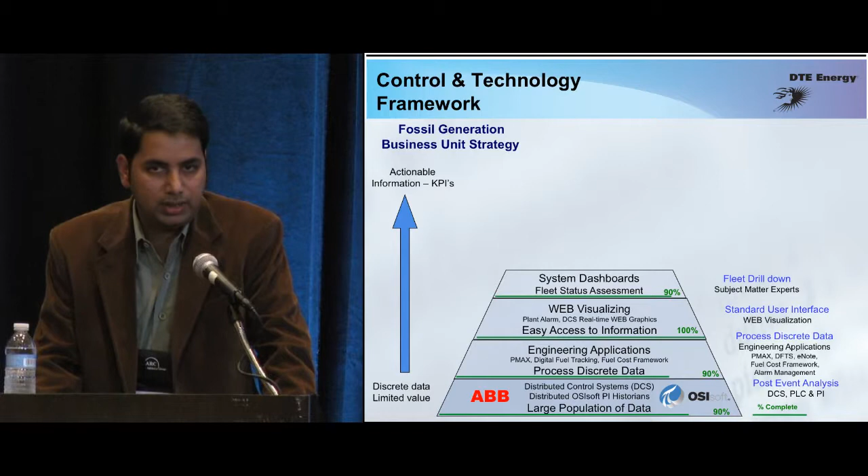Following that would be system dashboards, meaning focusing on different major aspects of your business. For power generation, it could be systems like a condenser system or a turbine system, etc. Then after that we get into the area of expert systems, where you're trying to predict - you have lots of historical information, you're trying to predict when an equipment fails, when a process goes out of whack or deviates. Closed loop optimization - those are all the expert systems in that layer.

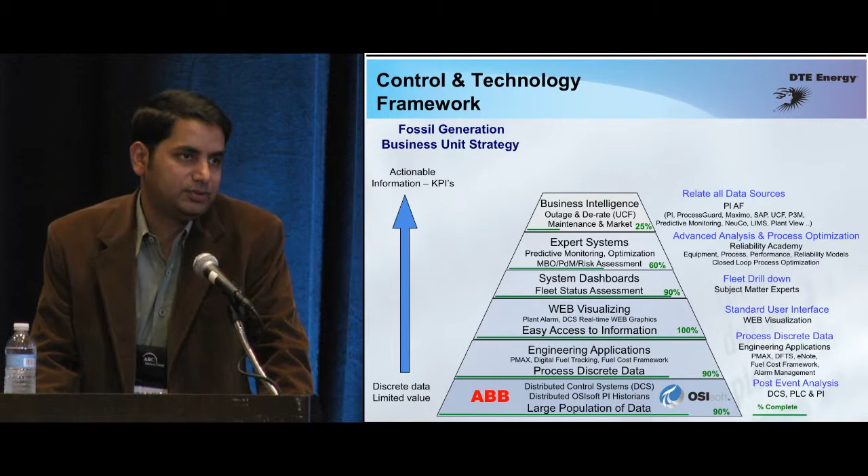Then following that would be your integration with your business systems - how the engineering data is being blended into your business systems, and that's what that particular layer deals with. Finally, the topmost layer of the pyramid is nothing but an amalgamation of people, processes, and technology.

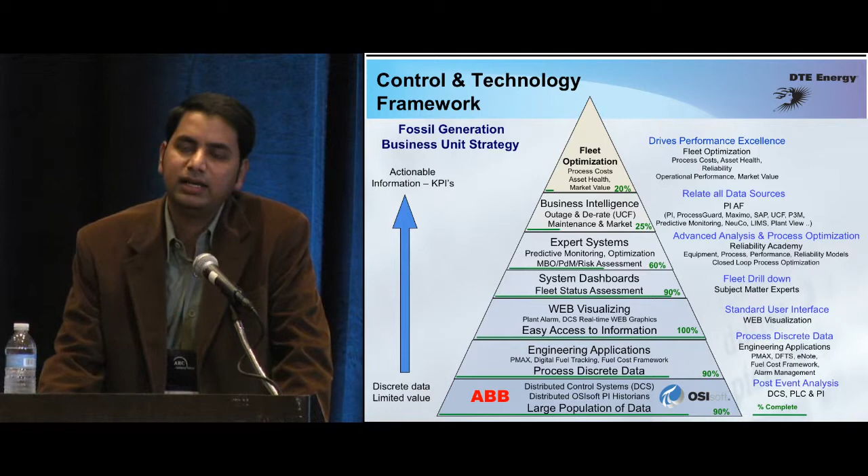So again, here's our remote operations center. The analogy I give people when they ask what this does is, you could call it your NASA command center, or as I like to call it, basically your air traffic control. The plants are located remotely. The control room operators at that plant run the show, they're like the pilots in an airplane. But the remote monitoring center is the one directing them what to do, warning them about impediments, weather changes, what's going to happen. All those directions are provided by our remote monitoring center. They're staffed by very experienced people from operations background, typically people with about 25 years of operating experience in a power plant, from the technical, engineering, and operations background.

So let's go through the pyramid one more time and look into some of the applications. As I said, the bottommost layer is where you have the majority of your data. PI systems are propagated throughout our company. Every plant has it by default, every new location that comes out will have a PI system. The obvious advantage is it's one single source where all information gets aggregated and captured, and you can exchange information from one location to another very easily using the PI to PI system.

Now for the remote monitoring center, they need to monitor data from every site, so you capture information from all the sites. Here's a typical technical structure of a plant. A plant may have anywhere from 20 to 30 data sources at the control system level - PLCs, auxiliary systems, DCSs together. But where they converge is all the data goes into the PI system, and that's central to everything.

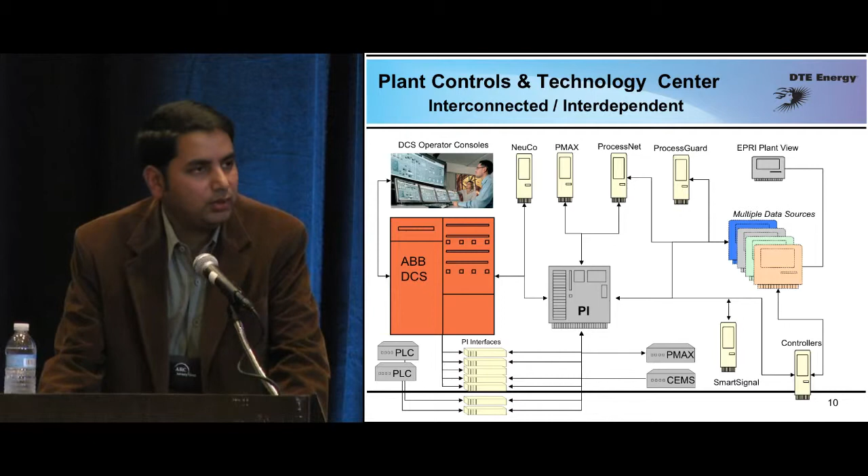Once you have your raw information, what can you do? You can do a lot of data analysis, and people do it. It's simply looking at these data points. You can do some trip analysis, some optimization - all of that can be done.

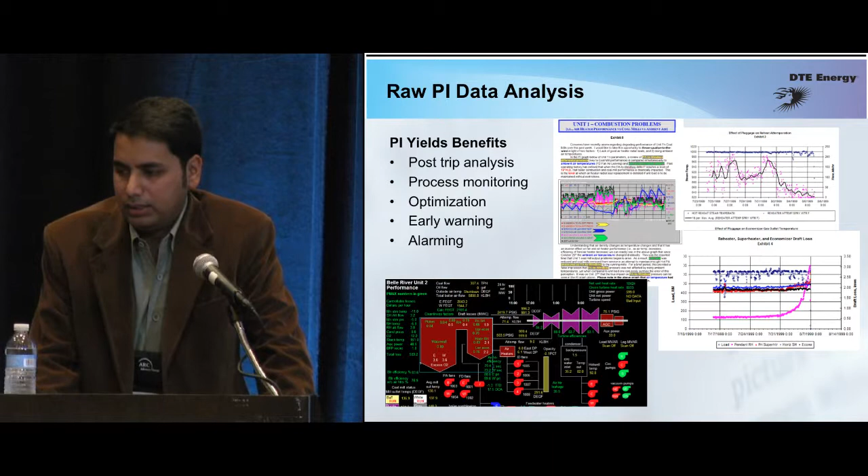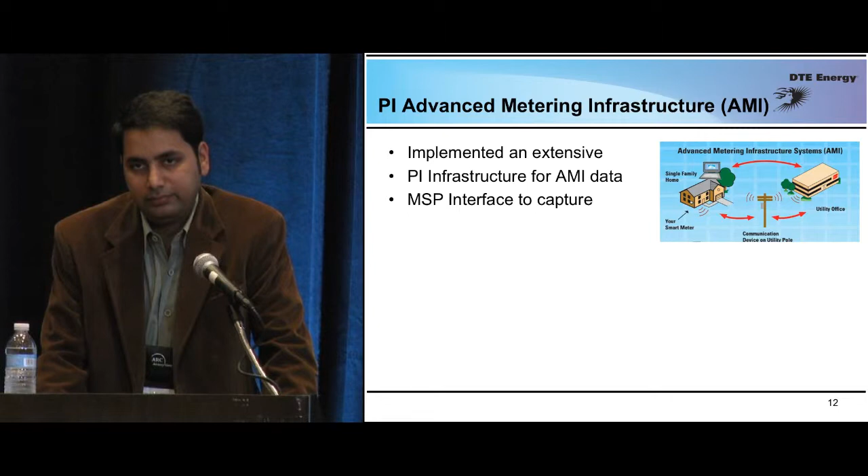But the bottom layer is expanding. From a generation side, we have a lot of this information on the plant side, but when we distribute power to customers - as I said, we have 2.1 million customers - you must have heard the term smart grid, smart homes. Part of that is there are smart meters being rolled out to customers. Each customer has a smart meter in his home capable of giving about 25 data points. With 2.1 million customers, you can do the math. As of today, we've rolled out about 1 million of these smart meters, so we're capturing about 25 million PI tags - valuable information being done remotely. So we have a huge infrastructure of PI systems capturing information from customers. The point being, the bottom layer is expanding, and it's going to expand.

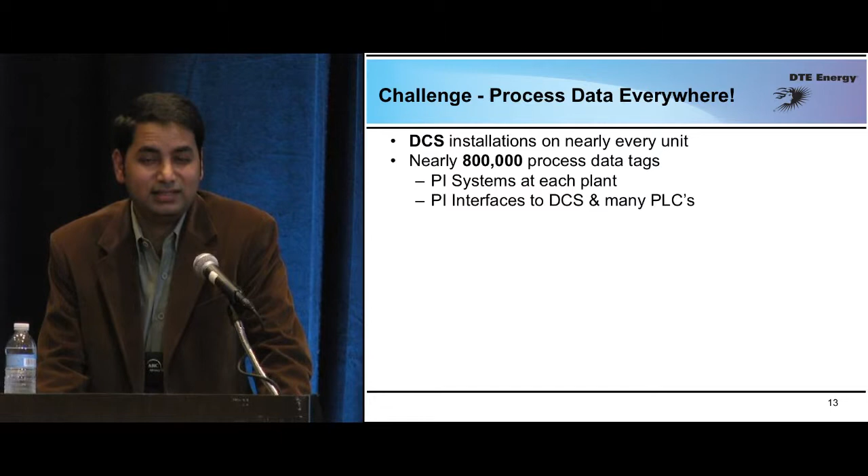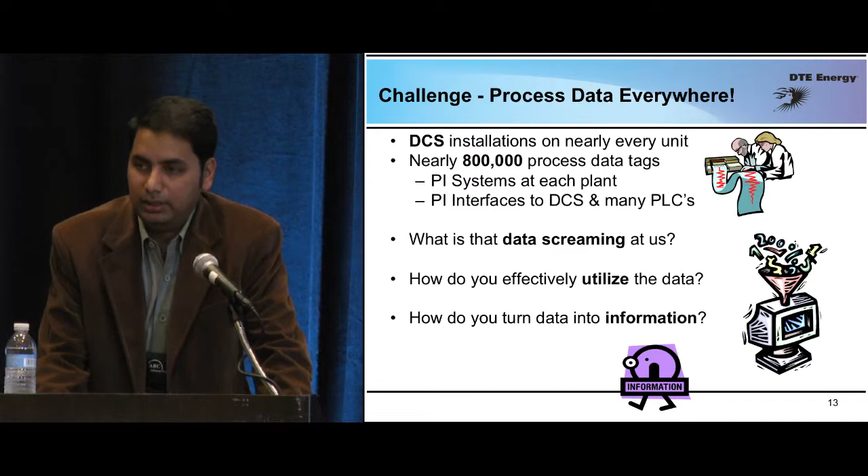So I'm going to focus the rest of the presentation just on the generation side of the business. As of now, there are probably about 800,000 data points just on the generation side, with DCS installations and PI installations everywhere. So the challenge is, where do you find the needle in the haystack? What's this data telling you? How effectively are you going to utilize this information, and how do you turn data into information? Those are the challenges, and the technology pyramid is the way we're trying to address it.

So once you have data, you do a lot of engineering applications. What are you going to do with these engineering applications? Some examples: a power plant is a huge thermal cycle, so all of your thermodynamic calculations for the mechanical engineers, all the inputs are coming from PI. The calculation engine just computes, crunches the numbers, and writes the values back to PI.

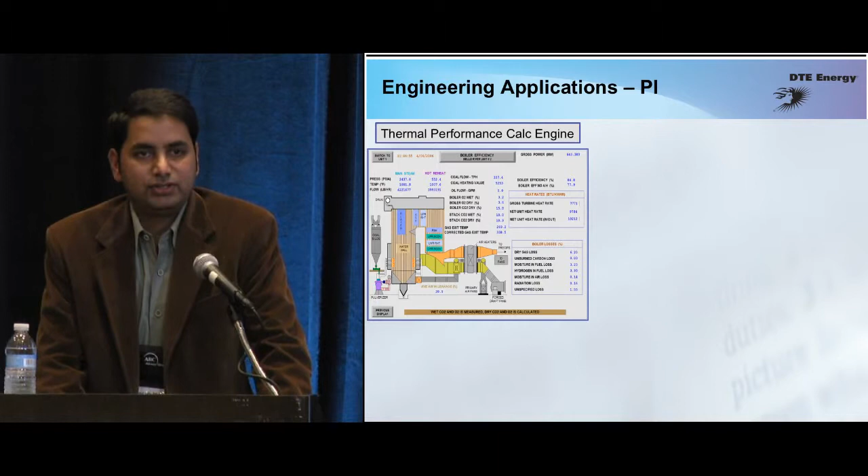That's one example. Number two, coal-fired utilities burn a lot of coal, so 95% of our expense is procuring fuel and fuel-related expenses. That's close to $1 billion at one location we spend just on procuring coal - that's our fuel expense. So we monitor that, and all of that is done through PI. That's another example of an engineering application.

The third one is your emissions monitoring. Power plants emit a lot, and there is an emissions trading floor. For example, if you emit NOx, NOx emissions are being traded in the market.

With PI, we use it to monitor the real-time operation of a plant, and the value of that emissions is basically traded in an emissions floor. So you have to capture the market value. That is done through an interface from OSIsoft called PI-to-HTML. It just goes on the internet to any website, captures a data point, brings it back. So what we're able to do is compute immediately the value of the emissions we put into the air. That goes into part of our emission strategy.

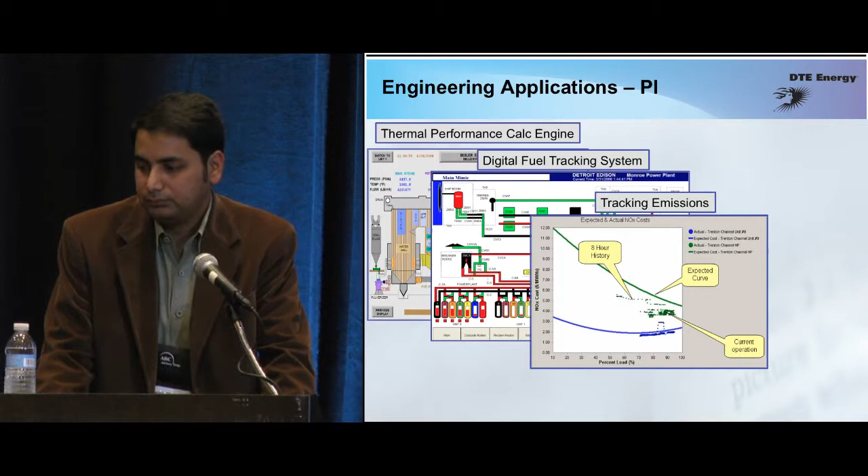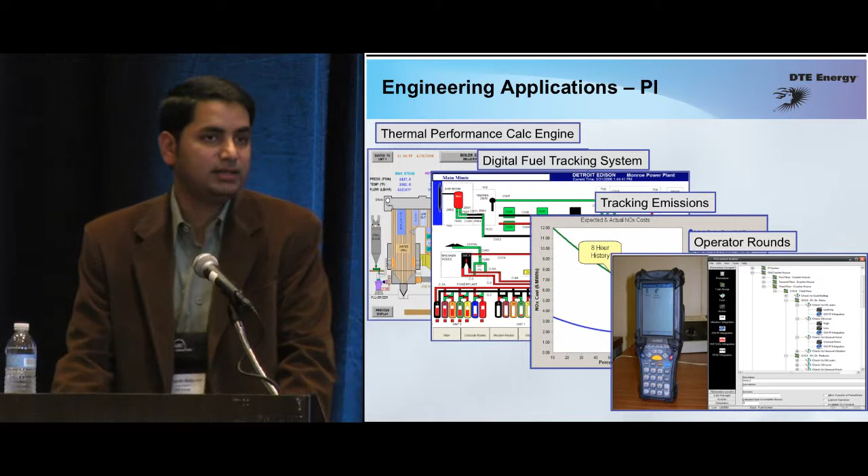Then finally, there are several processes in the plants. For example, operators are required to periodically go out and record readings, do their rounds. All of that is done through mobile devices, and that information is stored back into our PI system. So those are some examples of engineering applications.

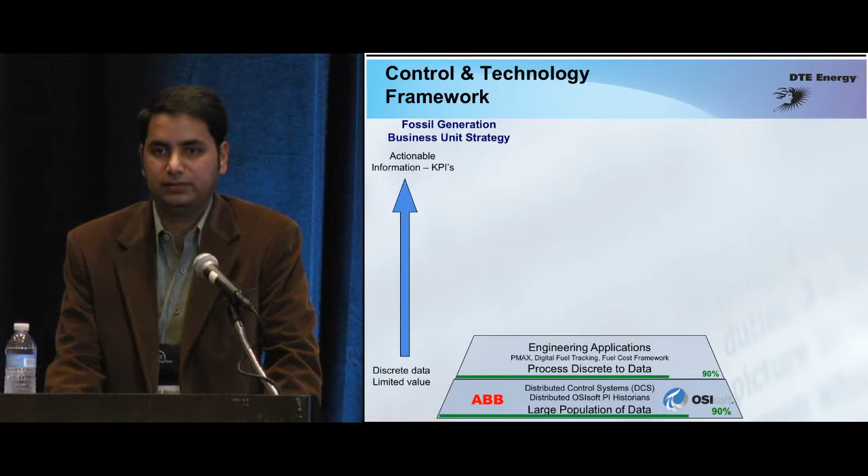Now the next layer is fleet-wide monitoring. We were doing a lot of point-and-shoot applications at a unit level, at a plant level. We never thought about it from a fleet perspective. This is about the 2005 timeframe, when our company was getting into a market where we were going to actively bid all of our generation into a market called an independent system operator market.

In the Midwest, it's controlled by an entity called MISO, Midwest Independent System Operator. We're going to compete with about 15 other utilities in the Midwest region, and the cheapest person gets to generate - the expensive units are going to be shut down. So it was impetus for us to run the fleet from a fleet perspective, the whole business together, rather than just a plant manager running his particular plant.

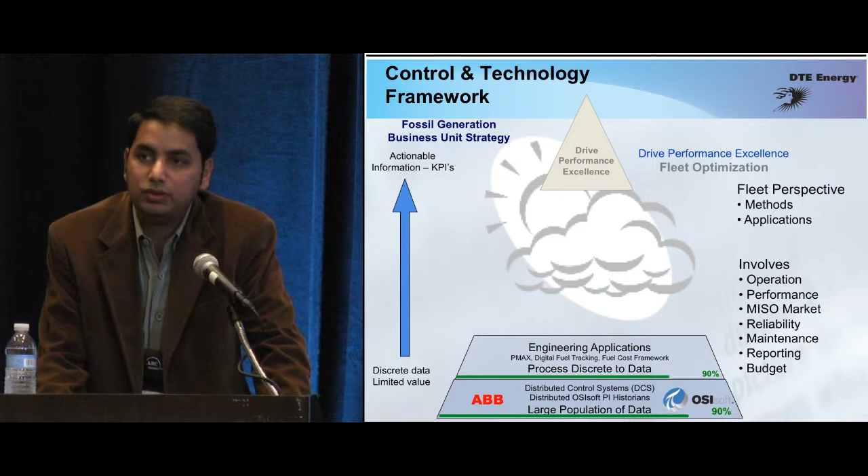So one of the first things we wanted to do at that time from a fleet perspective was give people the ability to look at this information, which means a lot of methods involved, and quite a few departments involved. Pretty much all of your various groups within your organization have to be part of this fleet-wide monitoring solution. One of the first things was the ability for people to view this information on a web portal.

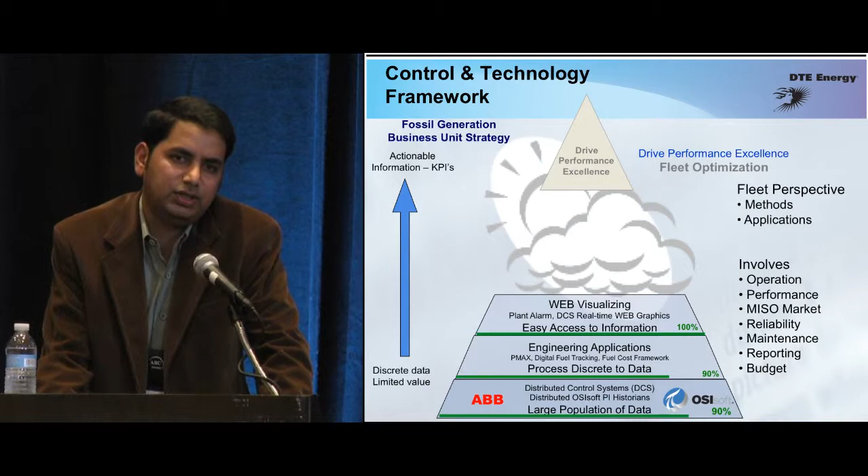Majority of you know that control systems are very isolated networks, which means when operators are controlling a unit, the distributed control system graphics are not available on your corporate business network. But that information is stored in PI. So what we have done is replicated about 6,000 DCS graphics into the PI system with the PI data as the background.

Now the remote operations center has the same look and feel of all the units in the fleet - 19 units, all the graphics done in this particular system. Now everybody knows what the plant operator is doing in real time, and this is one of the reasons why a remote monitoring center came into being. That's the primary reason - a virtual control room.

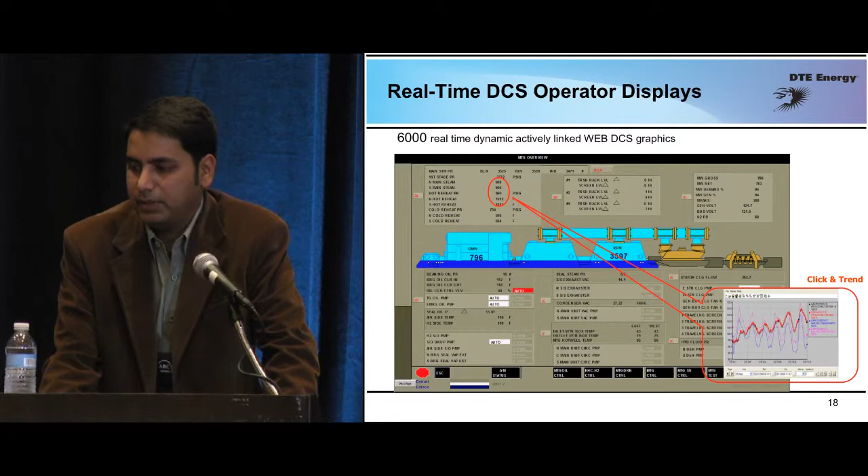You can do some simple data analysis with this information. You can actually replay events. Say you had a unit outage last night between 12:01 and 12:06 - what was the operator doing? You can just go back and replay the events and watch what he was doing.

Another example is a wind turbine - it's an AF element relative display. I'll talk about it later in the presentation, but that's another example of a display.

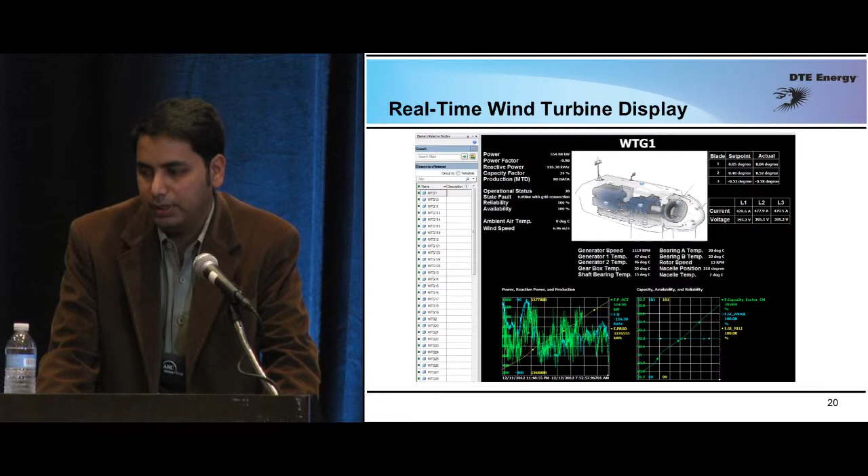Mobile workforce - let me tell you, here's the space that is rapidly changing. We're doing quite a few things because, as you see, the mobile platforms that have come into being right now, there is a lot of testing going on in our company. A lot of new applications will be rolled out.

But as of today, what people can watch is exactly what your units are generating, some statuses of equipment. You can see the engineering parameters on a turbine. I can look into how well you're doing in the market, the load trends of the whole Southeast Michigan. You can also look into if there are any outages and how the customers are getting affected. So all that was done through the mobile effort.

Now, after the web displays were done, we started focusing on system displays, saying that, okay, you have expertise in various systems in the plant, right?

So you have a turbine expert, a coal mill expert, a generator expert, and his focus is purely on his piece of equipment. You have generators in every plant, so his objective is to monitor that piece of equipment and nothing else.

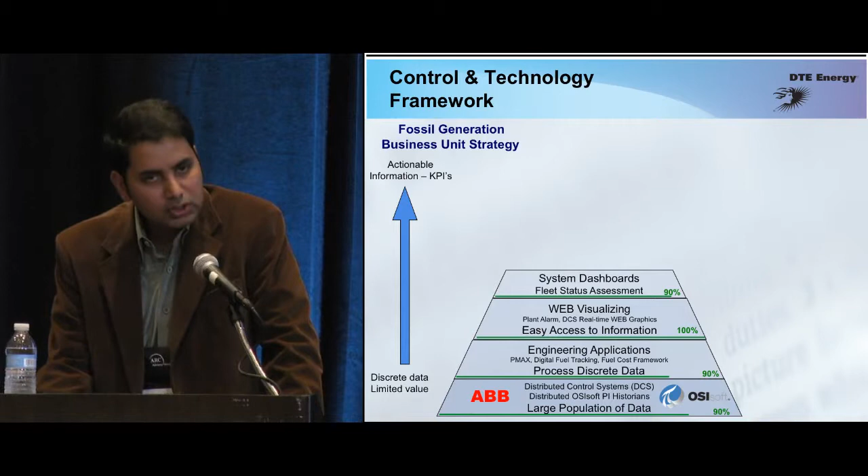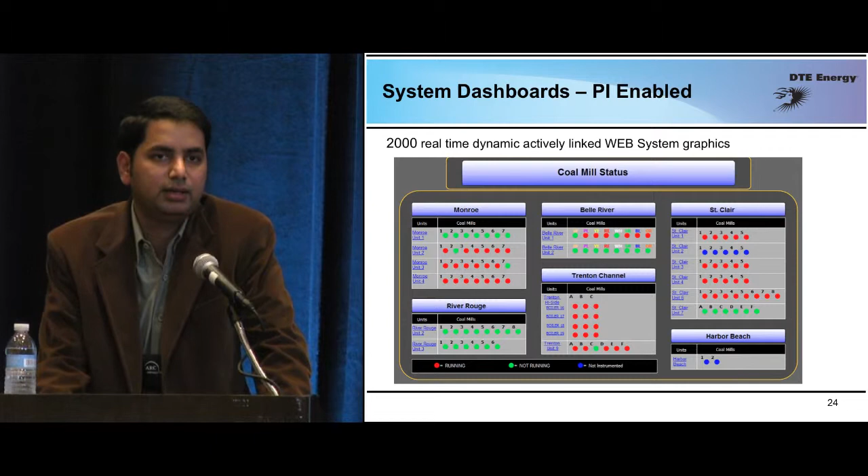So we created quite a few of these system dashboards. An example would be if you want to monitor all the 110 coal mills in the fleet, you have it available to you. That's the status of it. You click on it, it shows you detailed engineering information of those coal mills.

The next layer is called expert systems. This is where we're talking about predictive type systems. We've had the first PI system since 1999, so we have history for about 13 years right now. It's valuable information regarding your equipment.

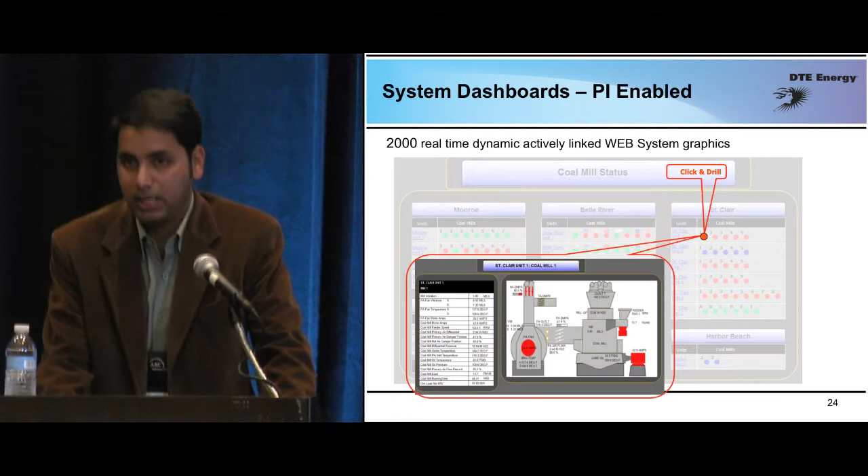If you do some sort of statistical analysis on that data, and you have some pattern recognition software that takes all this historical data, it will be able to predict an impending failure. That's what a system, this SmartSignal system, does.

Typically how it runs is you have in a control system an upper limit and a lower limit. When you hit those limits, there's an alarm, an audible alarm comes in the control room, which means by then the damage is already done. So you're in a firefighting mode at that point.

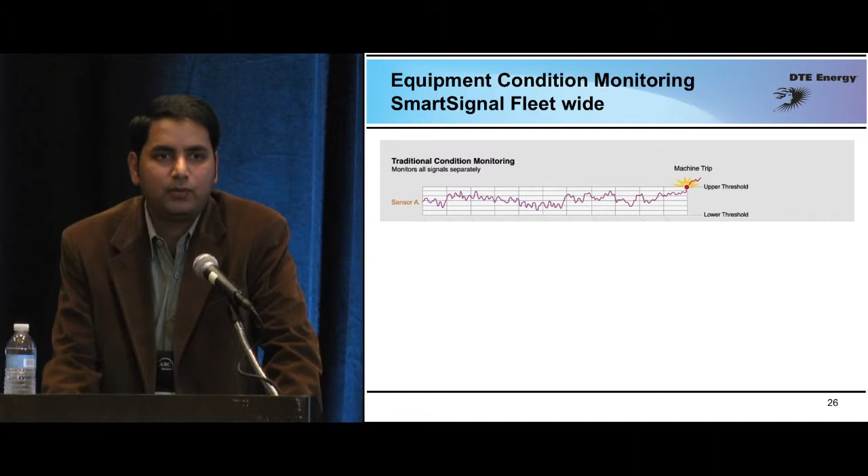What this particular equipment monitoring system does is it's correlating a data point to all the data points, all the inputs of that particular equipment, and it's trying to alert on a statistically deviating process well before it hits any of the control limits.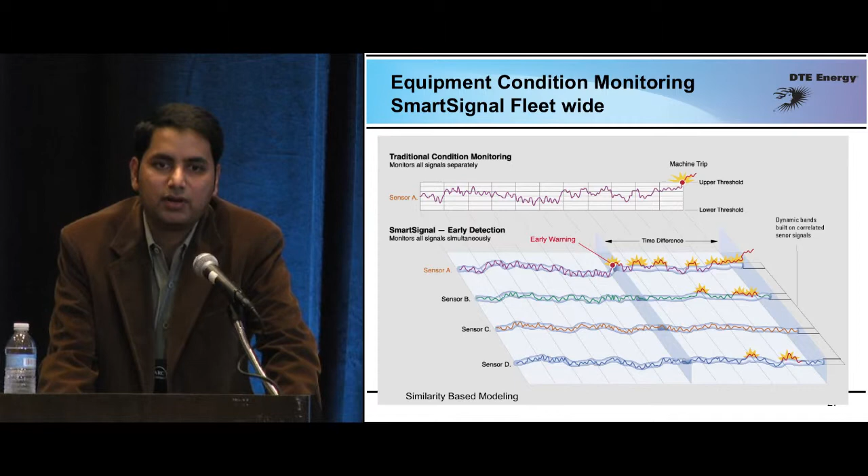Sometimes it can warn you of a failure like 45 days in advance. And that's very important for you when you are trying to bid your generation into a market. You know exactly that that equipment is faulty, it might come down, so you can hedge your bets very well. We have about 1,800 models on this particular predictive monitoring software across all these pieces of equipment.

Then we're going to get into the next layer, which is your business intelligence layer. I'm going to show you a couple of examples. One that is already in use, the second one is a work in progress.

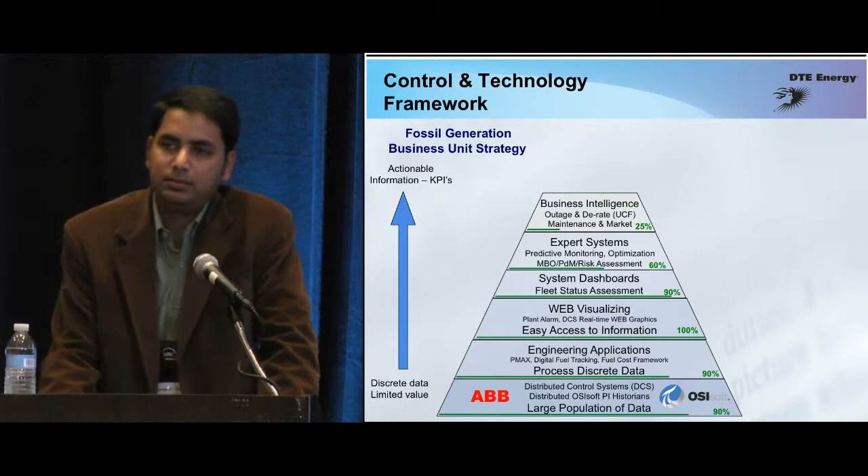So the first one is, as I said, we are part of an independent system operator market where we have to bid generation. So how we do it is, we have a day-ahead market, a real-time market, and a market strategy. All of your generation statistics are coming from your power plants in real time through the PI system.

This information, along with our predictive monitoring software, they use at our remote monitoring center, and then it devises a market strategy on which unit to be offered, when it needs to be offered, at what price it needs to be offered. Once the strategy is figured out, that information is sent to MISO. And then whether your bid was accepted or rejected, that feedback is sent back to the plants.

Now the plants know that, well, you have to generate X number of megawatts for this particular cost. If you don't do that, there are market penalties associated with that. That's a powerful business application at that layer.

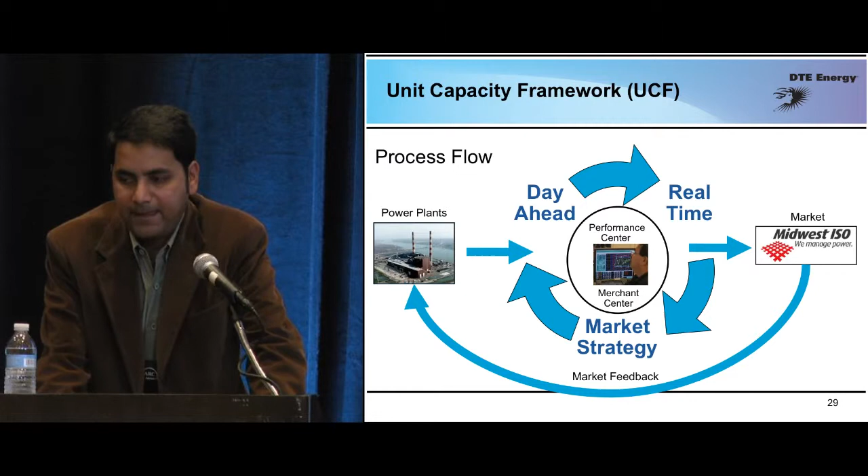Now the other example, as I said, in that particular layer, when we talk about business system integration, all of the layers below that were purely focused on engineering data. What would be more powerful is if you take this engineering information and blend it with your business systems.

For example, your work management system, your supply chain system, or your financial management system, and say, hey, I've lost 100 megawatts, a unit outage cost me 100 megawatts, and it translates into X number of dollars of revenue lost to the company. That's very powerful.

And that's where we were wanting to get, and that's the work in progress. So I'm going to show you basically how this is going to happen. And that pretty much completes our technology framework.

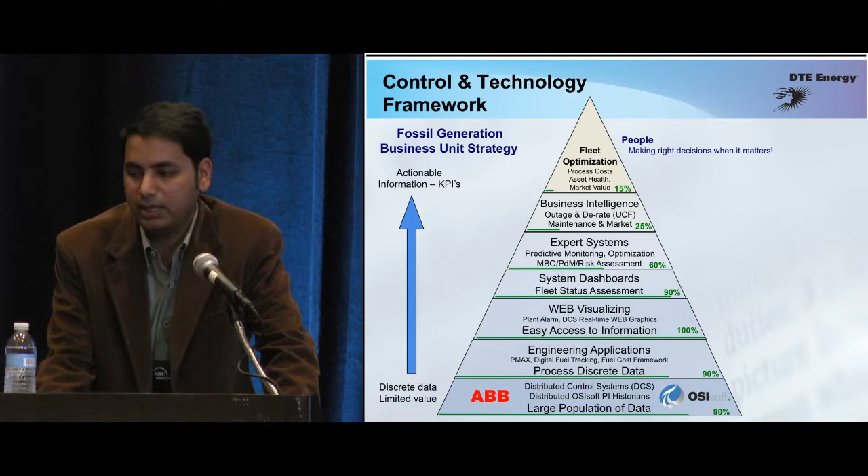But the top layer, the topmost piece, is not a technical piece. It is basically empowering the people to make the right decisions. So let me show you the work in progress.

So in the last 10, 12 years, we've rolled out the whole technology platform, technology pyramid, a lot of applications, going from very little data to a lot of data. So if I talk to a person in a plant about what he feels about information, does he have access, does he have everything at his fingertips, they are actually inundated with information. Their situation is something like this.

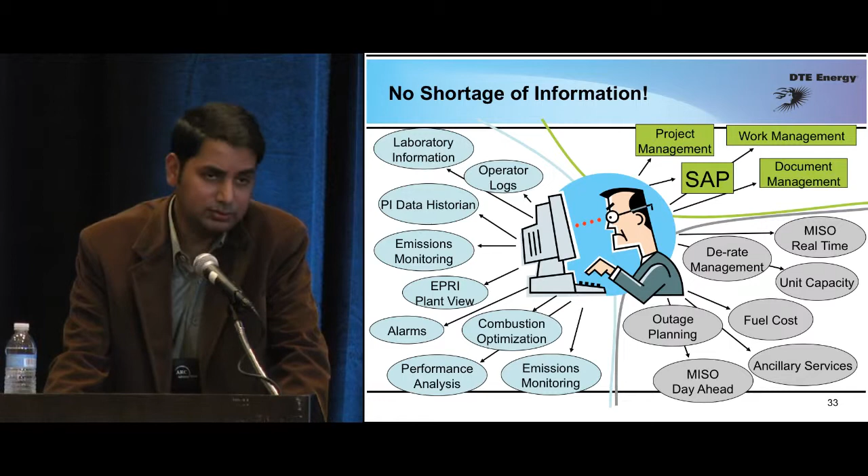So they're confused about which system to go to get what data, and what that system's login credentials are. That's a typical user, at least in a power plant. So we're trying to solve the problem of this particular user.

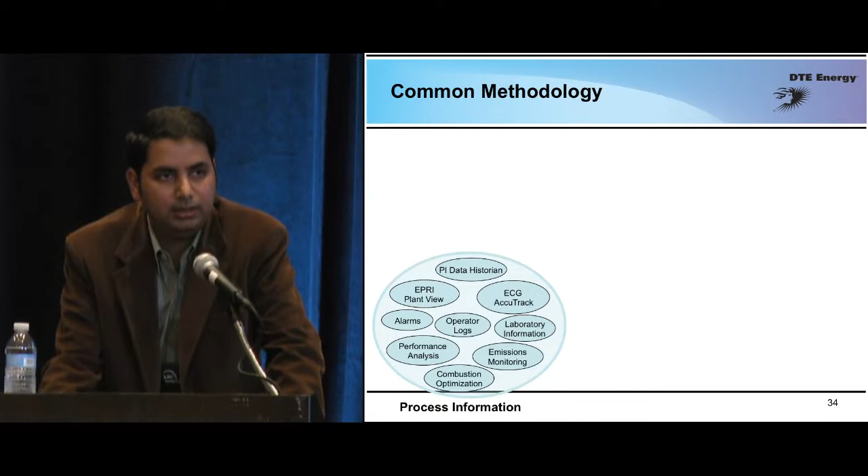The methodology we have is to pool all the information from systems like process information into a bucket, business systems into another bucket, market information into another bucket, and pool that information through some sort of middle tier application and show it to the user on a single front end. No need to go into any of the applications, it just comes into this one single application.

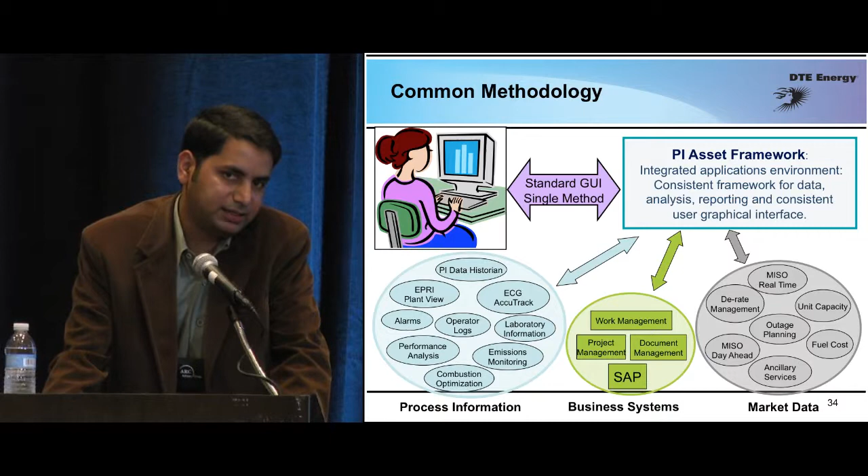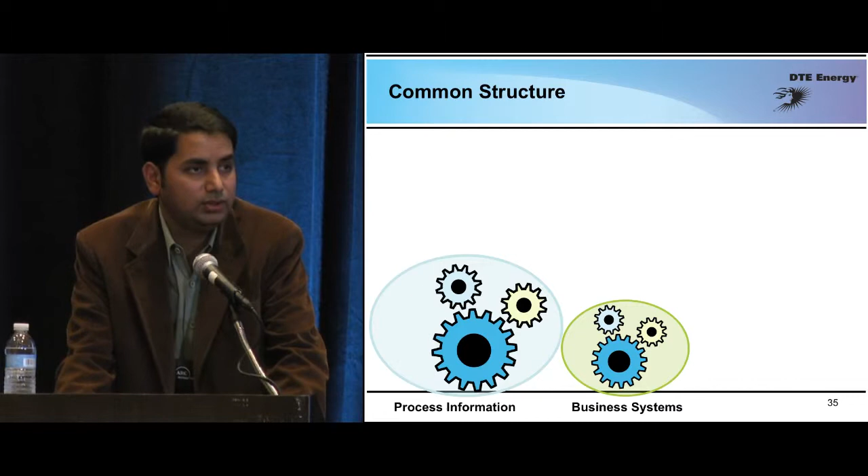From OSIsoft's perspective, they gave us a tool called PI Asset Framework. One of the requirements of this framework is that systems might change, but this whole technology should not fail because of that. Systems should be so transparent that changes just propagate. For example, your hierarchy in your work management system might change, but there needs to be a continuous feed into this system that synchronizes it all the time, so changes get propagated and the user is not affected.

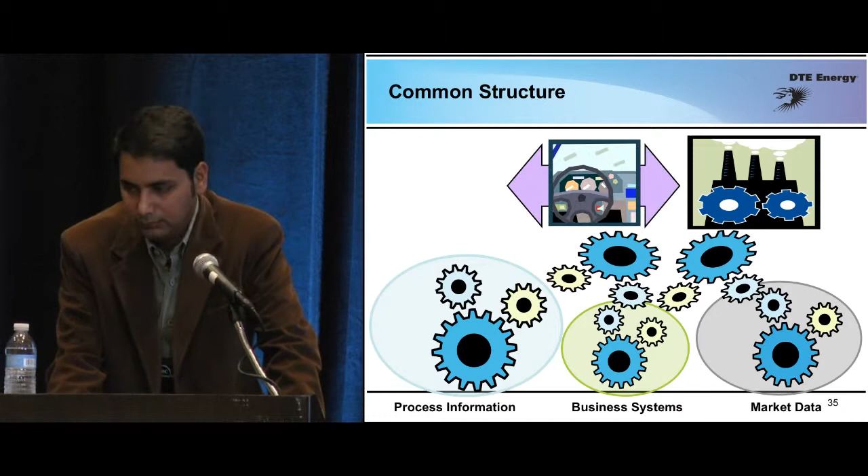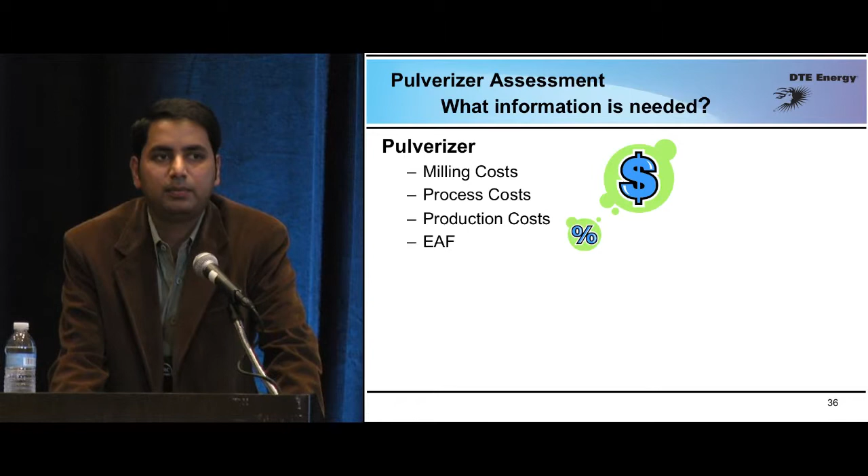Take an example of a coal mill. As of now, a coal mill expert can only see engineering information available in your DCS and PI system. But for him to make an objective decision about the overall health of his coal mill, he needs more information, like production cost information, reliability metrics, equipment predictive model output, what the work management system is saying about the work performed on that piece of equipment, alarms, etc.

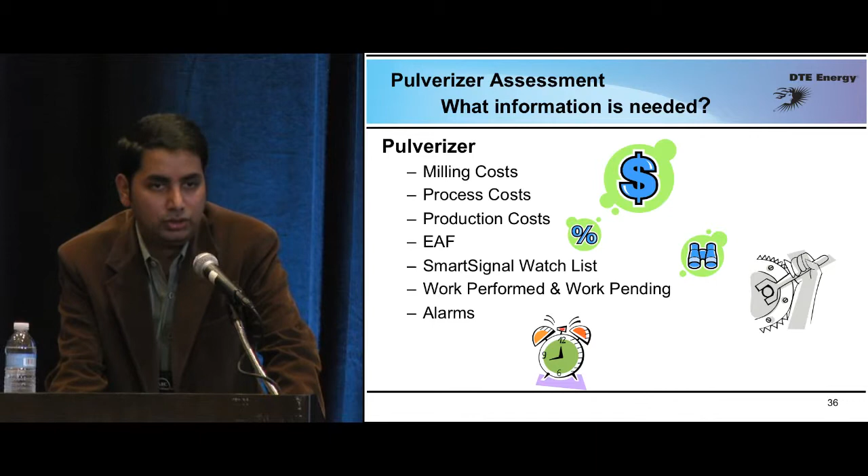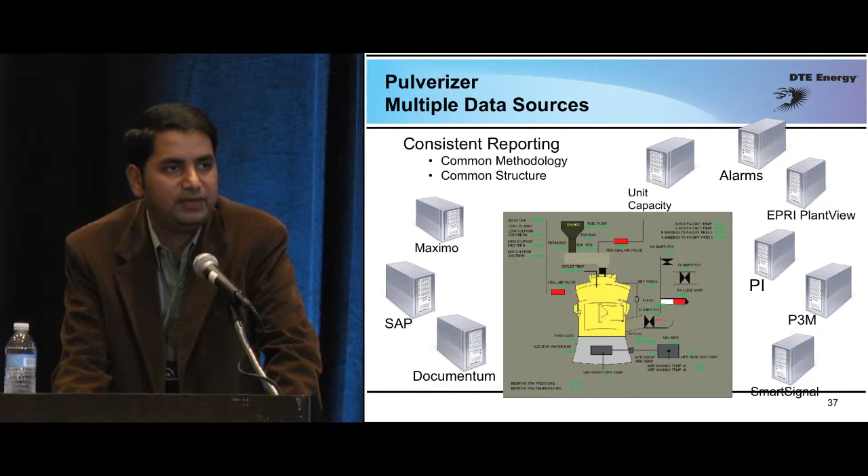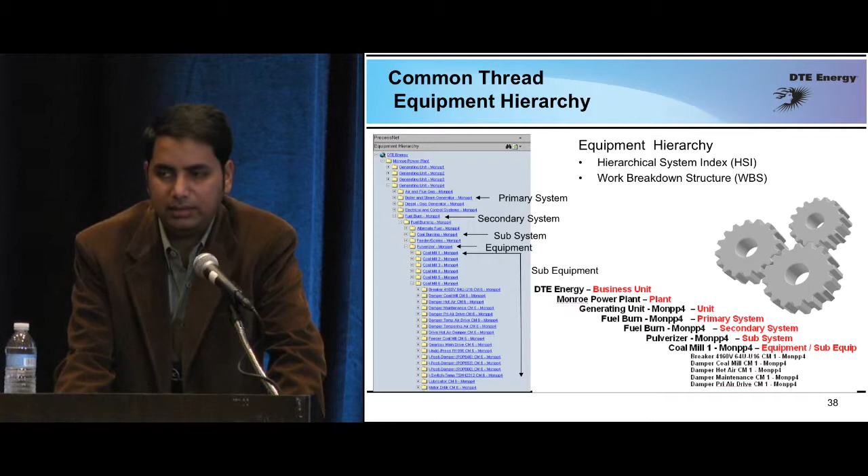If you want to take this simple DCS graphic and put in all that information I highlighted, all the KPIs, you would have to talk to so many systems, and each system is different technically, so there's no one-to-one correlation. So you need some sort of common methodology. For us, we call it an equipment hierarchy, a logical layer that organizes all of your assets in the company. You take this logical layer, design each of your systems, apply it on each of your systems, and then you can talk with all of the systems seamlessly.

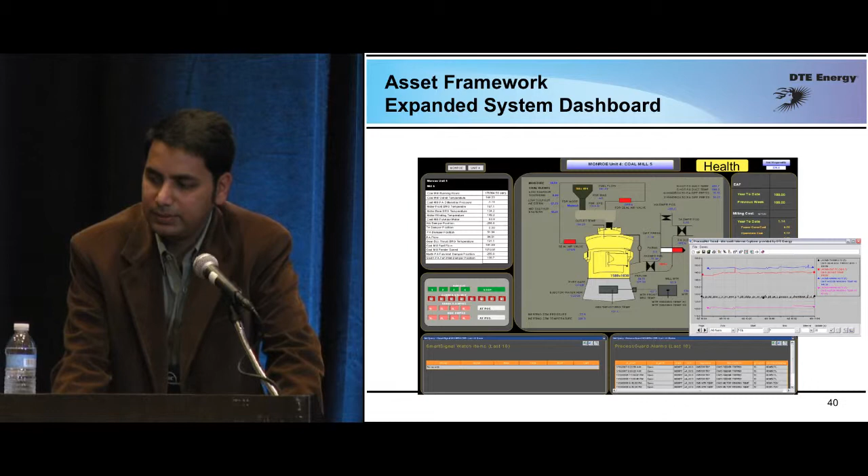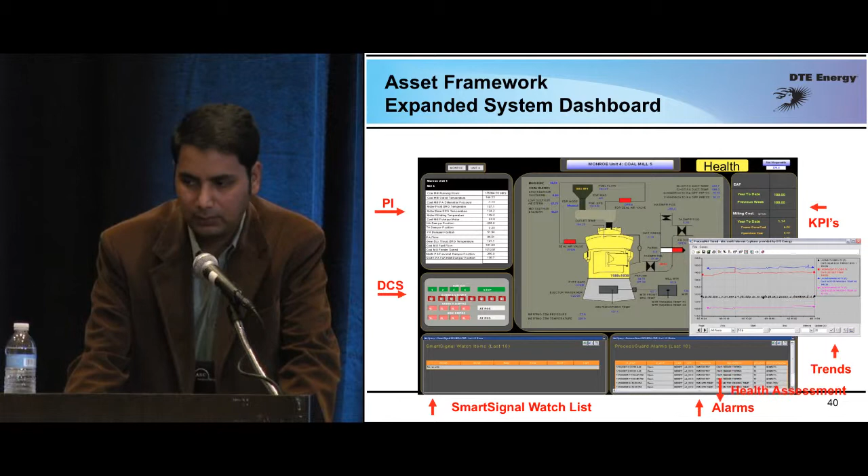Once you do that, you have an expanded dashboard that has information from your PI, your DCS, your SmartSignal, your KPIs, your alarms, trends, your asset health. In short, if you create a model for just one piece of equipment, you can replicate it to other like pieces of equipment. PI Asset Framework is the way to do it, and that's how we're doing it. We've started, we are in the process of doing that work.

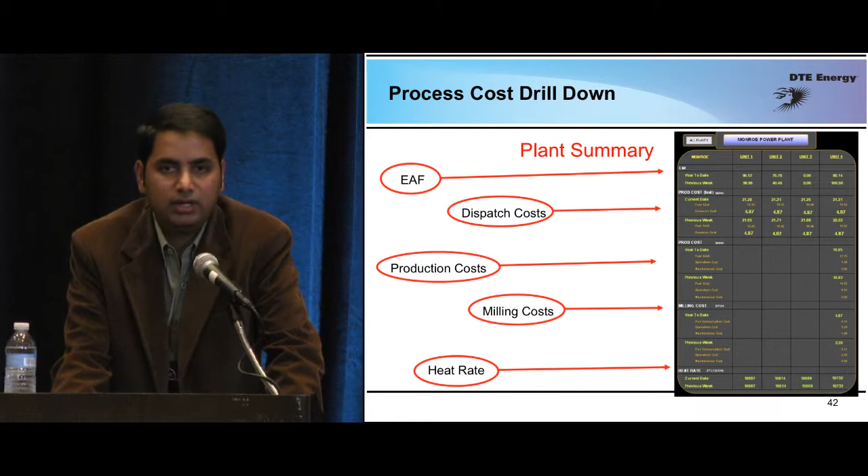So just to show you an example of screenshots, depending upon what your role is, you will have different kinds of screens. A plant executive, a senior executive in the company, cares about fleet-wide metrics, so he'll get summaries like production cost, milling cost, all sorts of costs from a plant perspective. If you are a plant manager, you're interested just in your plant, so some details about the same metrics, but just for your plant.

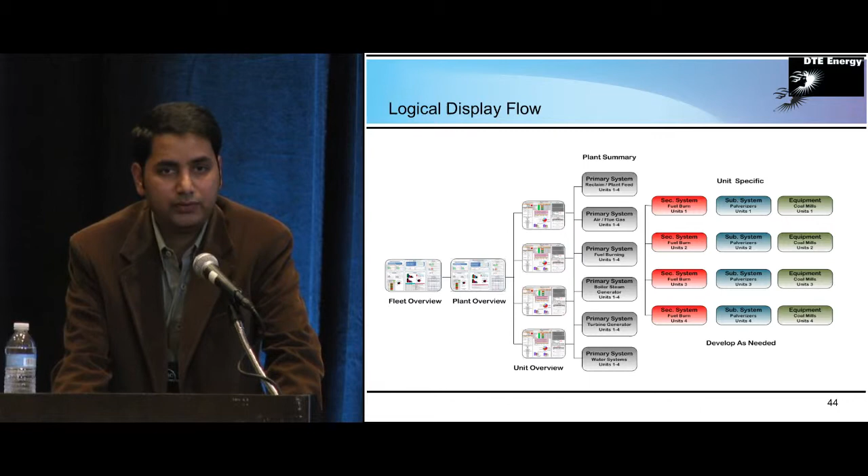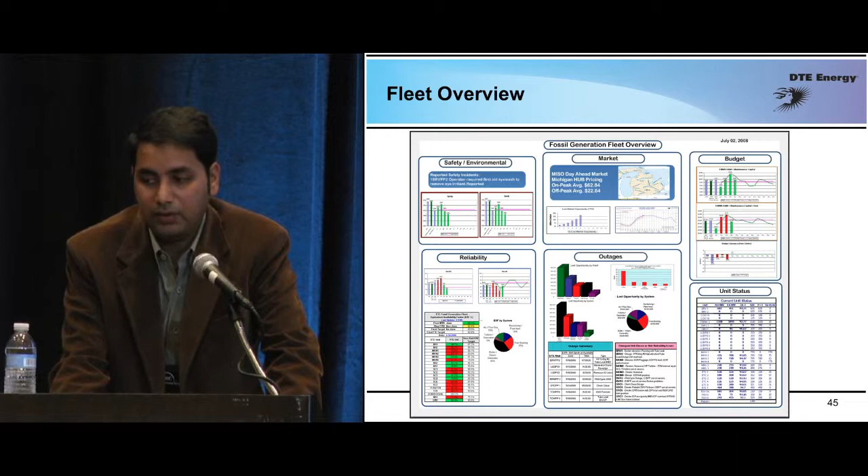So there is a logical flow of displays. A fleet overview will consider fleet-wide statistics from safety, environmental, operating conditions, market information, budget, etc. for the whole fleet. From a plant overview, the same metrics drill down to the plant level, and again at the unit level, the same metrics drill down to the unit level. Ultimately you will reach an equipment level, so for each display there is a different audience that looks into that.

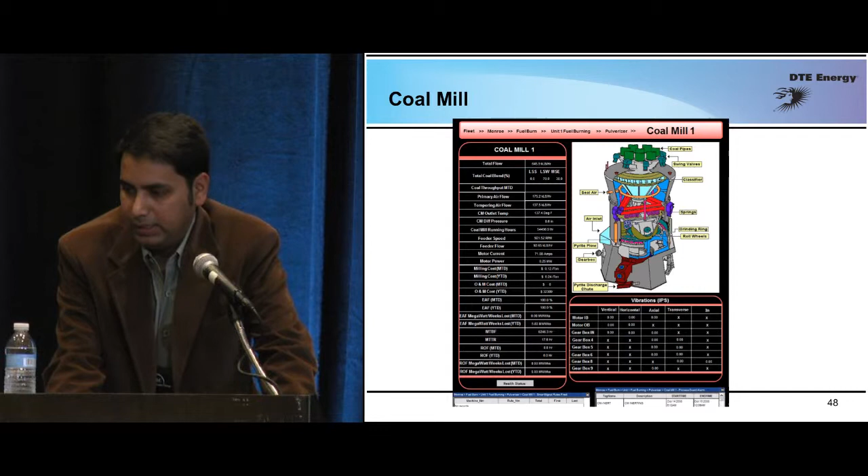So from a coal mill perspective, all of those KPIs now are blended into this one. Another report is about the health mill status.

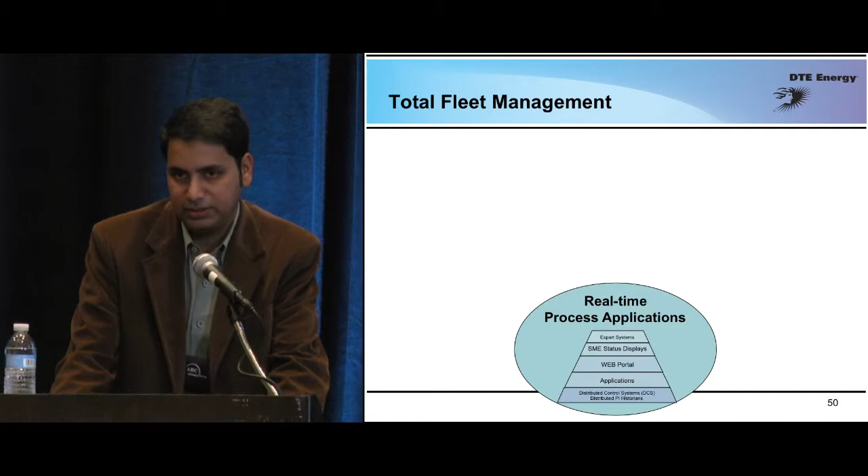So what does total fleet management mean for us? From a remote operations perspective, it is all the bottom layers of your technology pyramid. When you blend them with your financial management systems, your business systems, and with your market data, that's how you achieve performance excellence.